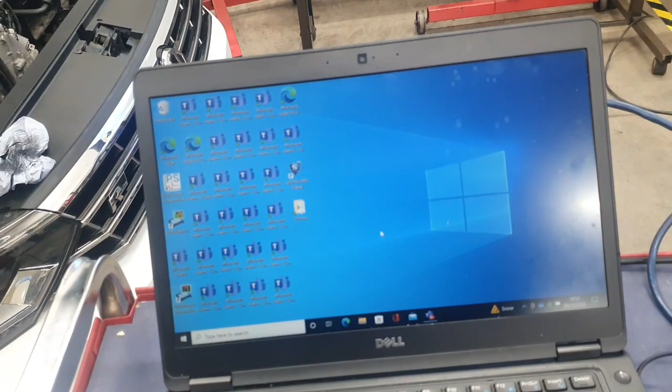So the test that I'm going to carry out now, it will help you analyze the condition of the engine, your pistons, the condition of the shell bearings, whether not the mains as such, but the big ends. You should be able to analyze the condition of those. It's a relative compression test.

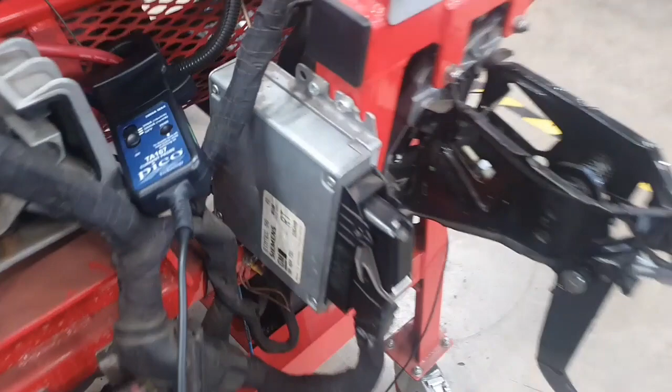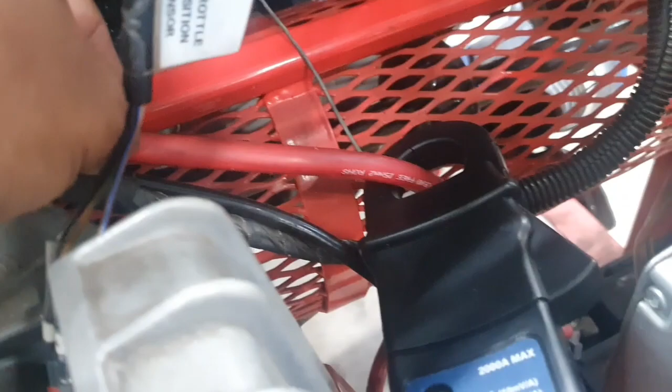I'm using a current clamp, okay, nothing else, just a current clamp. And as you can see, it's on, it's zeroed, and set to 2000 amps. And I'm on the cable that goes to the battery positive and the starter motor. As you can see there, it's going to the starter motor.

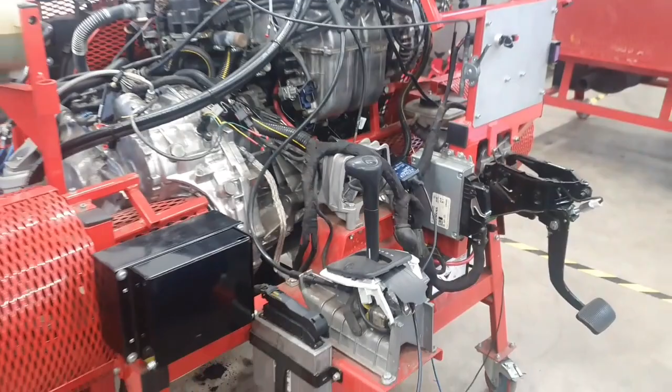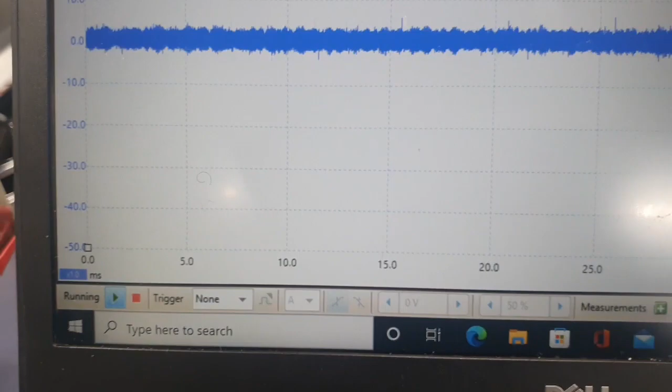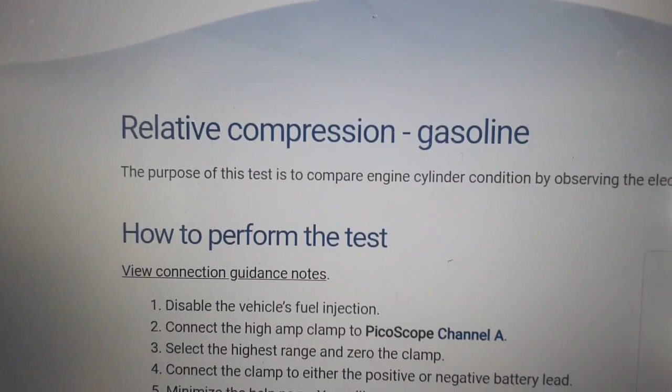I'll go to the software first and show you from the software. We want this one in the bottom, PicoScope. I know there's PicoScope 7, but I'm just used to PicoScope 6, I'll use it until they take it away. So go cancel, and when you go to the top, you select automotive, then you go to charging systems, then you go to relative compression test, and then you select gasoline because I'm working on a petrol engine.

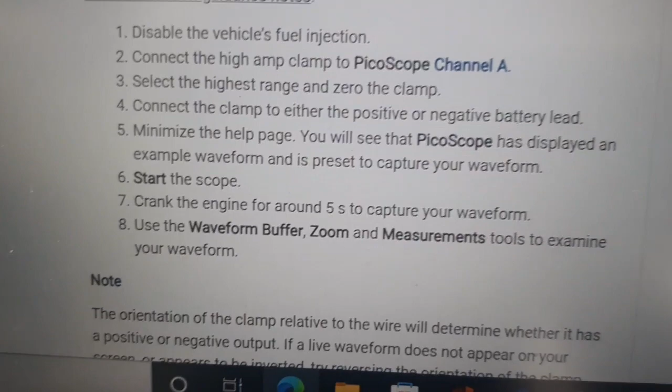Click that, and then next it gives you all these instructions as to what to do: disable the vehicle fuel injection, connect the high amp clamp PicoScope on channel A. So just follow these instructions as you see them. So I'm gonna click here. This is what I'm expecting to get.

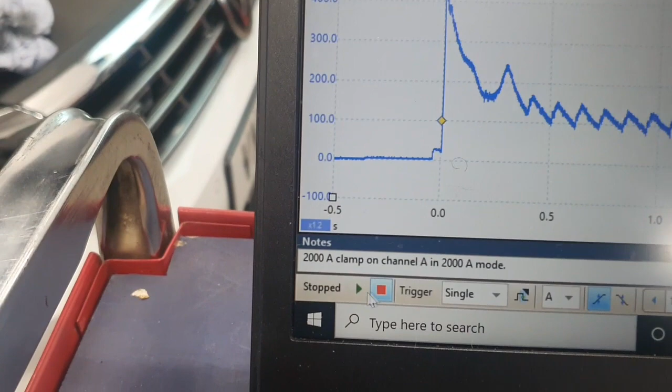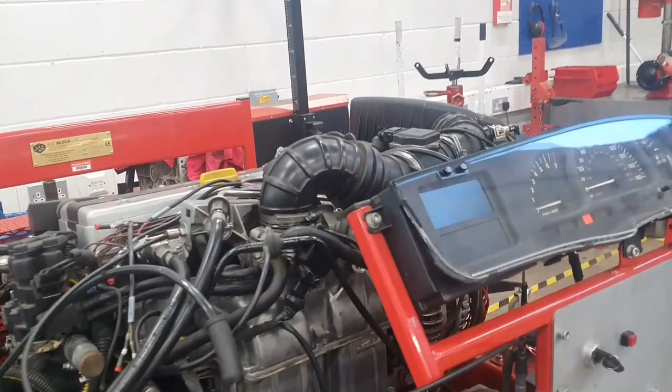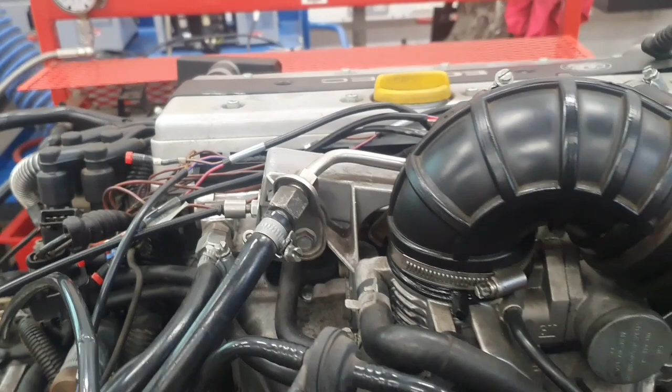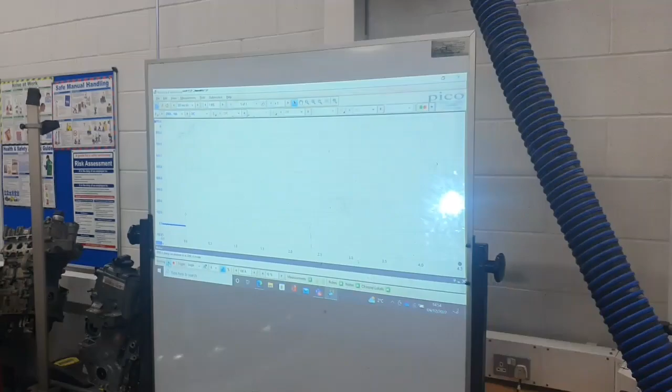So I'm gonna click on start. Okay, now I'll come to the engine, and I've made sure that she's not going to start, and remove the fuse for the fuel pump, and then I'll make sure that the throttle is fully open, and then I'm gonna - forgive my projector, you can see what it's doing, so I'm gonna be quick. So I'm going to crank, but it should not start.

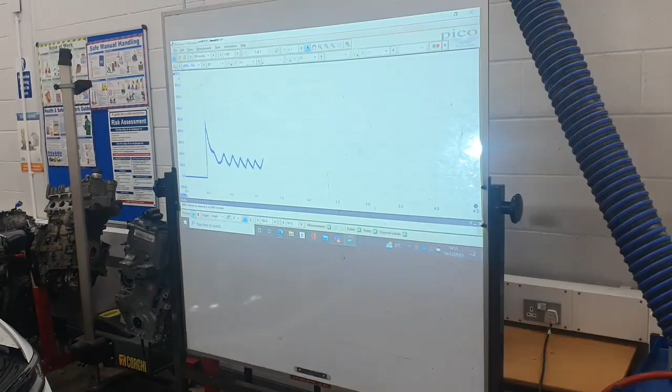Okay, here is our waveform. Oh, you can see it's pretty good. See these peaks that you see? These are compression peaks. You'll never know which one is cylinder 1, which one is cylinder 2.

So if you want, next time I'll take it to the next step, I'll show you how to do the cylinder numbering. Let me just introduce it for today, but I'll show you next time how to determine the cylinder numbers, and then use the firing order to tell which one is 1, which one is 3, 4, and which one is 2. But for now, let me use what you see here - our current was sitting at 0.

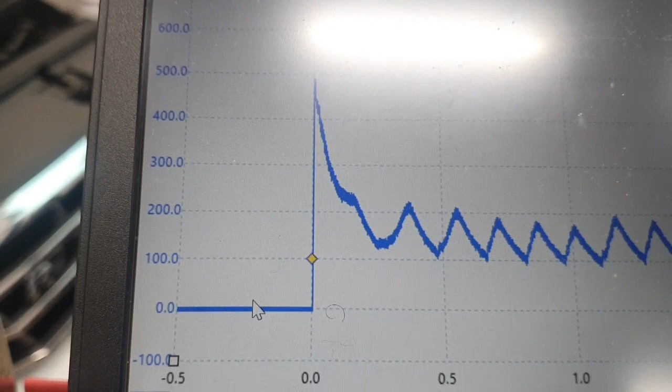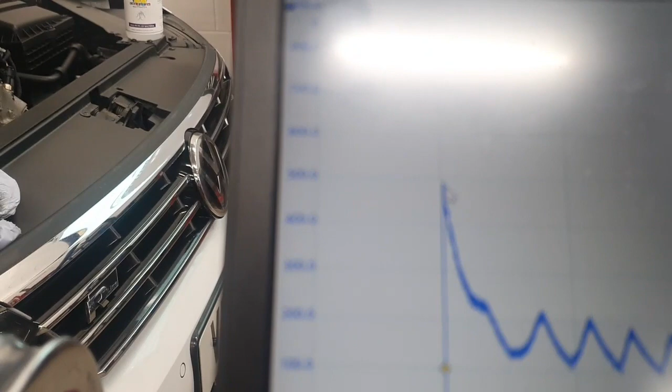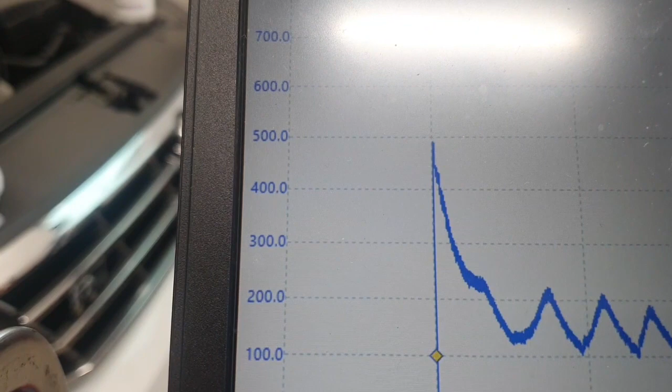You'll agree with me, you can see that. Okay, our amps were sitting at 0, and all of a sudden, this is called inrush current. You can see it went to 500 amps, almost 500 amps, because if I pull down the ruler - it's 491 amps, okay, you can see that here.

So the fact that these are even, it shows you - this peak here, the starter motor at this, that's a compression, so it draws a lot of current, and then that drops. Another cylinder is on TDC, like that. So what we can do...

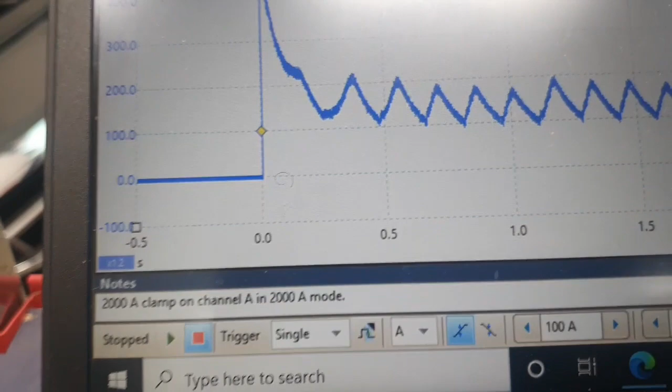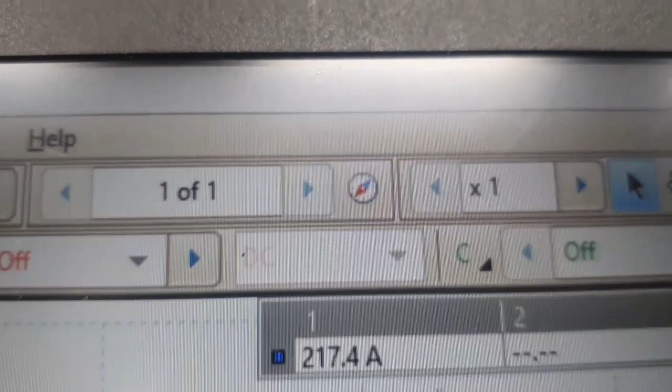We can see that initially it drew 491 amps. But what you need to do, you can bring it right here. See, roughly that stabilized and it settled at 217 roughly. Okay, look what I've done - I just put a line here, roughly 217.

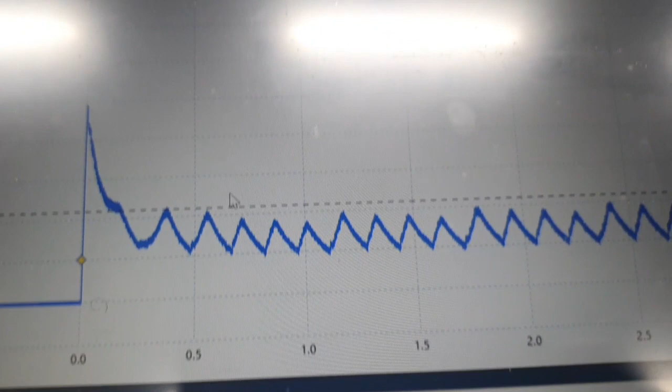Or what we can do, if you want, we can actually bring it slightly lower, right, somewhere there. I think that would be fair. Yep, that would be fair. That's 194.5 amps.

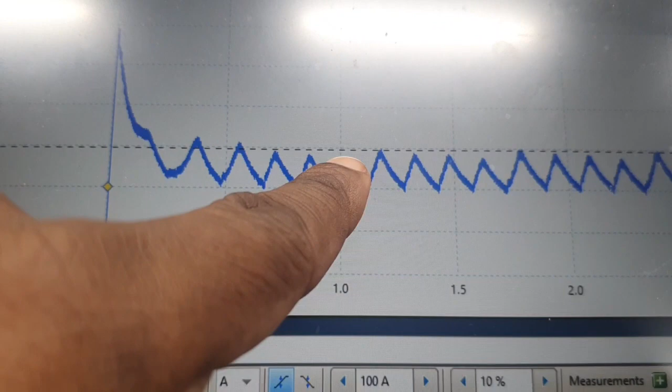So this is what you use if you want to determine if there was a misfire here. I can tell you, as you can see, just notice that wee cylinder there - okay, it repeats itself, it repeats itself again, repeats itself. So remember, when I carried out the relative compression test using those green bars, we had one cylinder that was slightly lower. I'm proving it using this test.

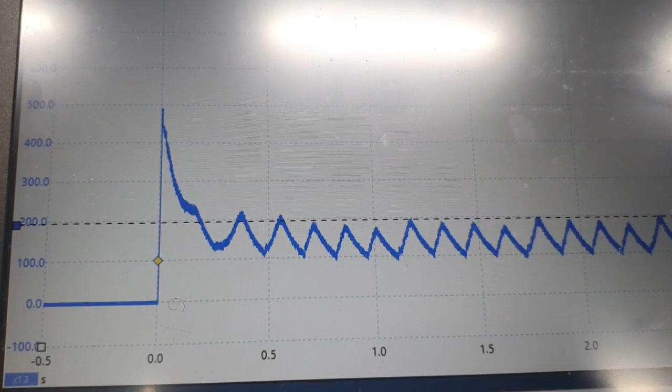I have used this test to determine a misfire, and I've actually found an engine that had a knock, and the knock was caused by the bearing, that shell bearing that was completely worn. So it is a very, very, very, very effective test that you can carry out.